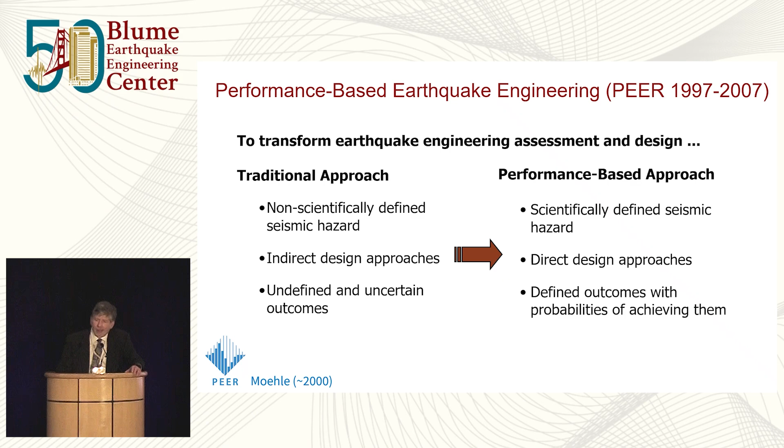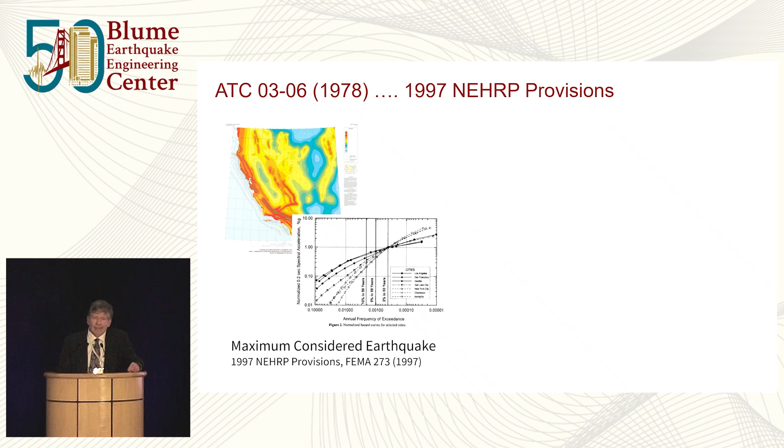Just thinking about things that were setting the stage, PEER started in 1997 with this mission, and it just so happened that was the year the national hazard and building code went from the old zone maps to what we now know based on a probabilistic seismic hazard basis. The maximum considered earthquake appeared in the NEHRP provisions and then in ASCE 7, the building codes, in 1997. So we're starting to get the hazard piece into that.

In terms of the vision of performance, I really credit a lot of the practitioners who worked on these things. This diagram associates different levels of performance with different return periods of earthquakes and with different types of structures, whether it's a safety-critical hospital or other. This was really laid out in SEAOC Vision 2000, which was published in 1995. So these were the things that were kind of in place at the beginning of that process.

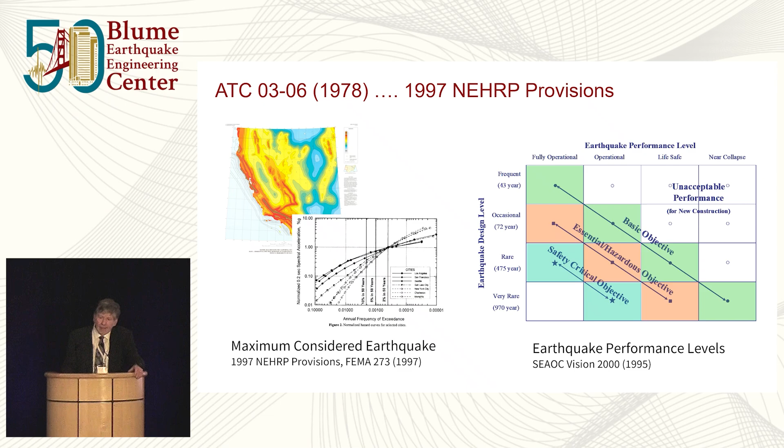Also, some projects going on at the time - Helmut Krawinkler, there was a SAC Steel project looking at the damage to steel moment frames after the Northridge earthquake. Helmut was in charge of a team there looking at overall building performance, doing a lot of Drain-2D analyses of these case study buildings that were put together with SAC.

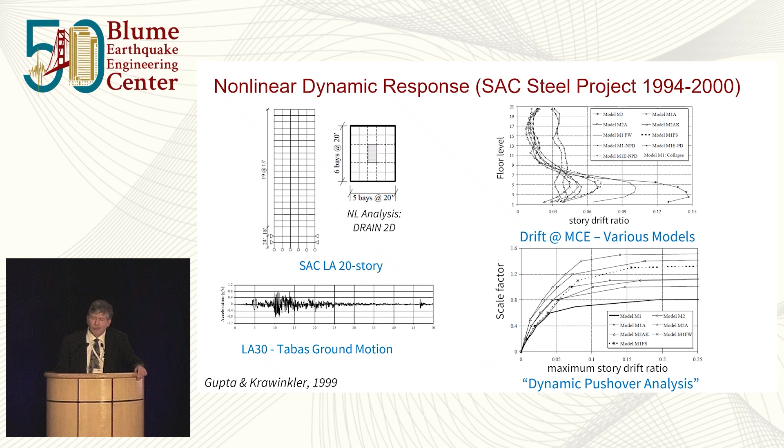And at the time, we were really going from a static pushover analysis to nonlinear dynamic analysis. In fact, the first name these kind of IDA, incremental dynamic analyses, had were dynamic pushover analyses, which is really just taking a ground motion and incrementing it out - but it's not a static analysis, it's a dynamic one with increasing drift.

As Bill and Ann mentioned, Alan Cornell with Dimitrios Vamvatsikos - a lot of people were sort of doing these, but they formalized the method and looked carefully at it. This is a fascinating paper, it has about 6,000 citations, so it's worth taking a look at. They looked at what happens as you increment it and how the behavior changes, and came up with resurrecting cases, as they called them.

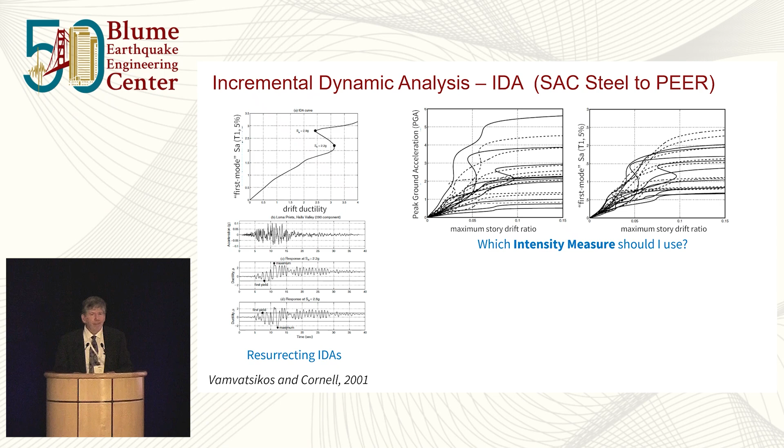Also, an important question was: what do you put on the vertical axis as you increment the ground motion? How do you keep track - is it the scale factor, peak ground acceleration, first mode spectral acceleration? These were all questions at the time that Alan brought to the table. And then there were a whole host of questions on the legitimacy of record scaling, statistics on response parameters, and so forth that are laid out in this paper, and people are still grappling with going forward.

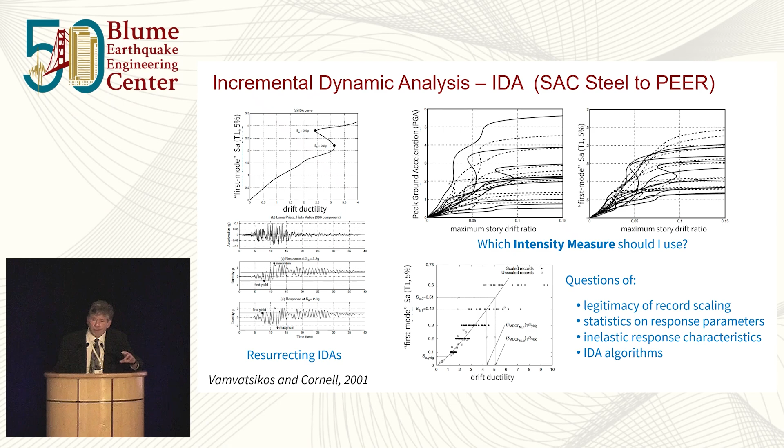But this was like early 2000. Ann mentioned the work of Keith Porter, that PhD thesis on assembly-based vulnerability of buildings, which is what Peer was subsequently going to do in the FEMA P58, this very detailed set of analyses. Keith had actually outlined that in his thesis at the outset. Keith Porter, in the PEER Center, we later enlisted to actually manage some of the testbed case studies that were done in the center, so Keith continued to stay involved in that.

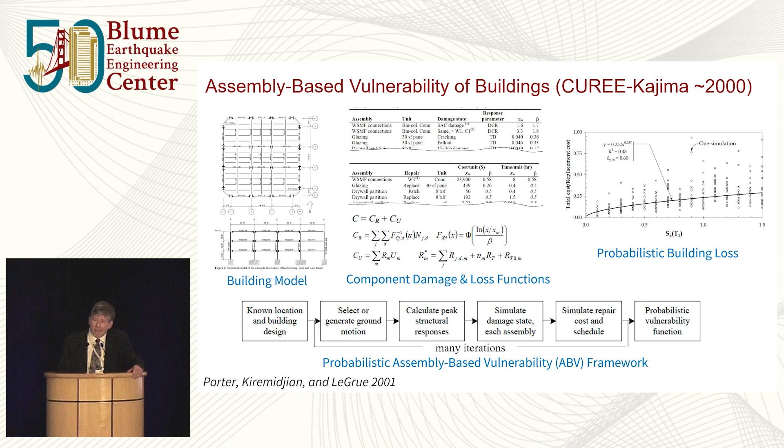Helmut Krawinkler, with a good friend of his, Peter Fajfar, from Slovenia, organized a series of workshops. They became known as the Bled workshops because they were held at this lovely Lake Bled in Slovenia. They started out looking at nonlinear dynamic analyses and next-generation, performance-based building codes. This was big around 2004. By the time Peer came along, a lot of the framework had come together, so there was a lot of discussion there. Then the last workshop in 2011 looked at moving from performance-based to resilience.

In terms of performance-based concepts, Bill Holmes comes up with very clever ideas and ways to articulate those, and this was a slide he brought to the PEER Center. Thinking about first-generation performance-based design, he mentioned ASCE 41 going back to FEMA 273, and where we were trying to go was bringing in dynamic analyses and more explicit measures of response. So that's essentially the framework that was being developed through the PEER Center.

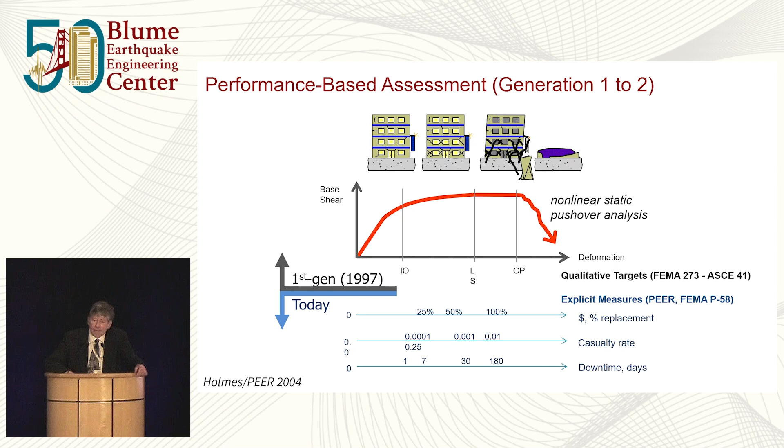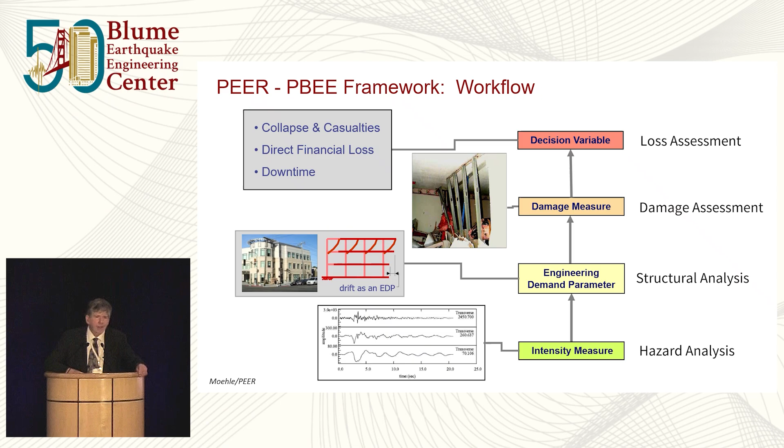In the process, breaking it down, going from the hazard into the structural analysis, into the damage assessment, and then into the loss assessment, clearly articulating each part of the process. When you're working with a large collaborative group, as we were in the PEER Center, you're doling out different projects to different people and groups who work on different parts of that process. So having this kind of modular framework was very helpful that way.

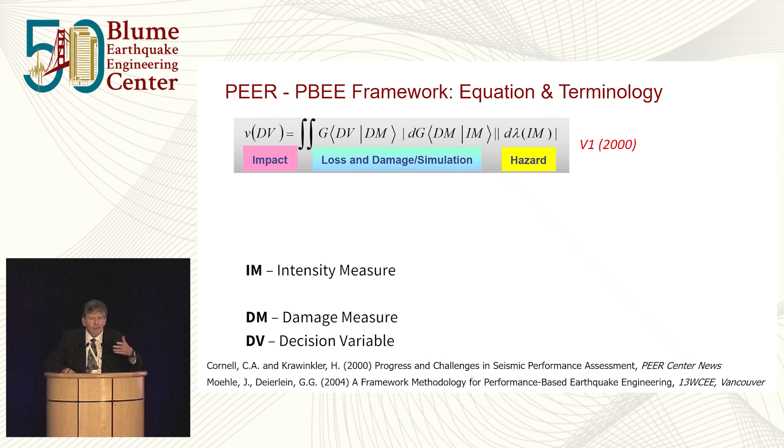The first version of our integral equation was something that Alan Cornell and Helmut wrote in a PEER Center newsletter, a double integral equation going from intensity measure to damage measure to decision variable. The damage measure was actually characterized, if you look at the paper, in terms of drift. Quickly, some discussion arose, though, where we said, well, drift is not damage. Drift causes damage. So we disaggregated it a little bit further.

We got to our triple integral equation, which added in this engineering demand parameter, a phrase Helmut came up with. Going from the intensity to drift and deformation demands, and then to damage, given the drift, what's the damage, and then to the decision variable.

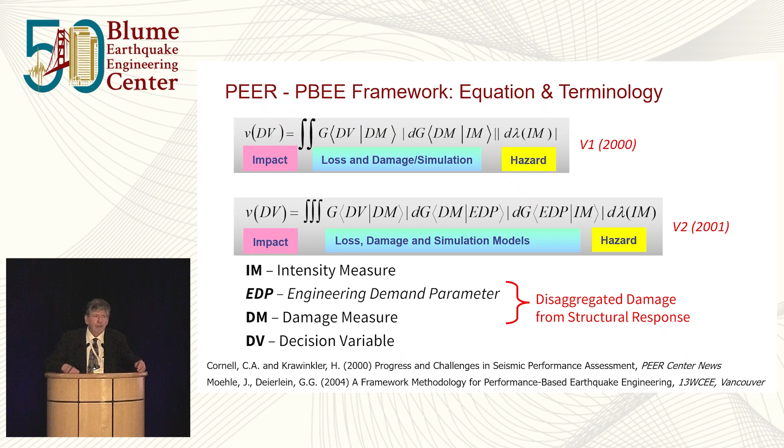I wanted to pause here to say these terms, IM, EDP, DM, DV, if you look around the world now, papers everywhere use this language. It started really with their paper and propagated through the Peer researchers, and then people read that and it continues to be used. It's really a great organizing construct. In fact, in the PEER Center, we used it effectively to explain what we were doing to the various site review teams that came. Now I'd like to touch on a few components of that, the IM, EDP, and so forth.

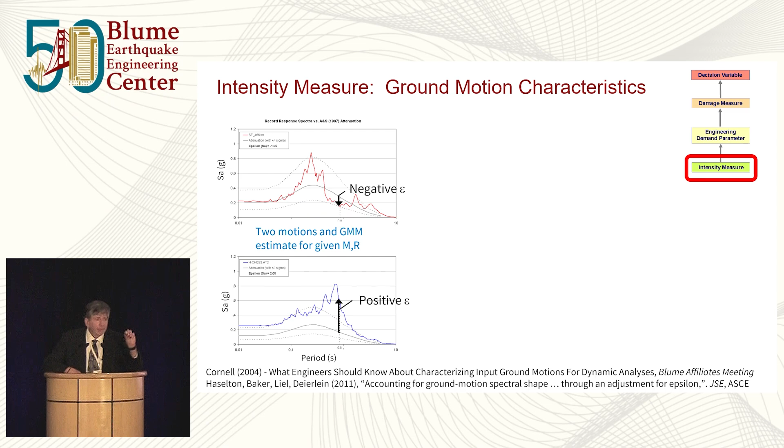The intensity measure of ground motions was an area that Alan Cornell really worked on quite a bit, along with Jack Baker. Looking at it, if you take ground motions with a ground motion model for a given earthquake magnitude and distance, and do a ground motion model, some are above it and some are below, you could have a statistic of epsilon, which is how much the variance is at any given period. When we're doing these incremental dynamic analyses and scaling up something in terms of SA at T1 at a certain period, if you take two ground motions that nominally have the same magnitude and distance, you could scale into the same SA, but the spectral shape would be totally different.

Alan coined this phrase, playing on KISS, keep it simple stupid. At one of our affiliates meetings with the Blume Center, he said it's ISSS, it's spectral shape, stupid. Stupid being stupid is a good thing.

Okay, but this really got into the whole question of record scaling, because at that point we were scaling up records. We weren't using PGA, we were using SAT1, but there was a lot of record-to-record uncertainty. But this began to dissect that there's physics underneath these records. They come out randomly from the earthquake, but there's physics driving the structure.

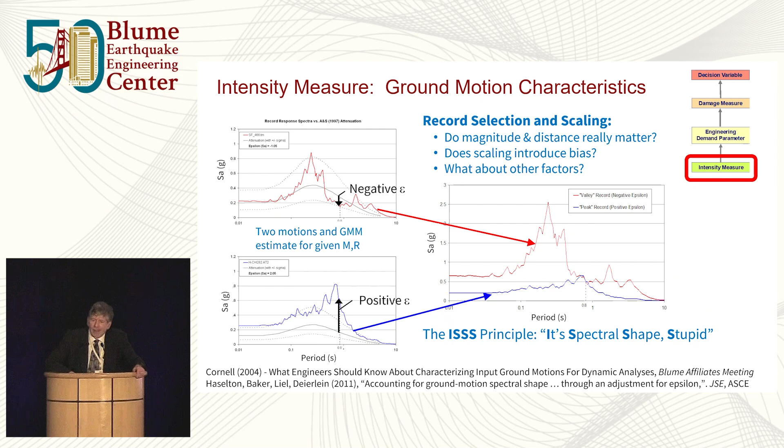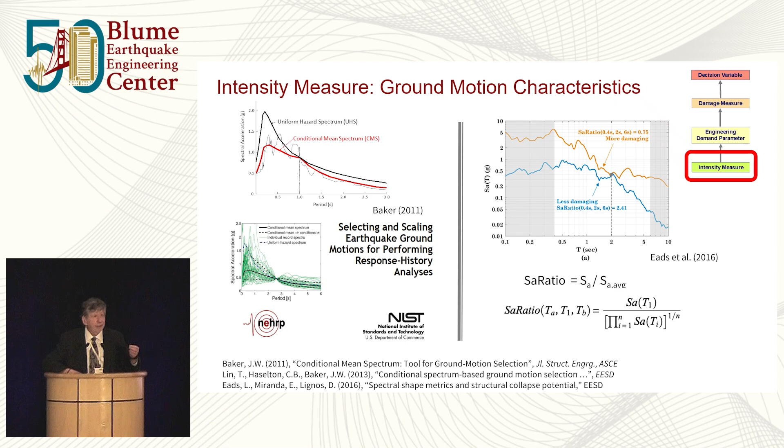So subsequently, Ann mentioned Jack went on to take that concept and develop it further in the conditional spectra that's out there now. Eduardo Miranda has also worked on a different idea, thinking of an SA average, averaging the SA value over a certain period range. You could then normalize that by the spectral value and get an SA ratio as a conditioning factor to characterize the spectral shape.

You could also think of earthquake duration. We've done some work - Abbie Liel and some of her students at Colorado have done this. The duration of the earthquake record heavily depends on the magnitude of the rupture. The rupture is continuing, especially when you get to these large subduction type earthquakes. And if you look at the available recorded ground motions and look at what their significant durations are, and then if you look at a place like the Pacific Northwest under Cascadia, we have no recorded ground motion.

So the thing is, everything we do with recorded ground motions, developing testing protocols in the laboratory and so forth, is kind of predicated on the kind of earthquakes we've recorded, but we need to think of the larger events. So the idea is you could think of duration as yet another adjustment we make to this, quote, intensity measure that could be considered.

But in order to pick up that duration, if you're doing it analytically, you need models that capture the cyclic degradation. Some have done this before - some as recent as the 2000s - without degrading models and see no duration effect. But when you put that duration in, you start to see that effect.

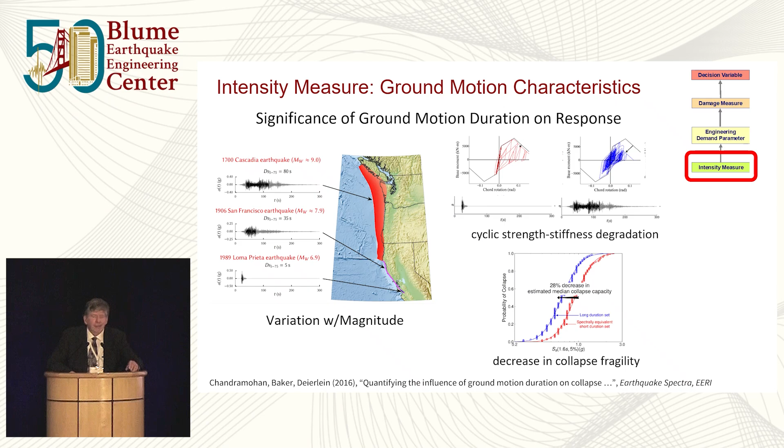And associated with this, getting this engineering demand parameter, doing the nonlinear analyses is looking carefully - and this is where Helmut's brilliance came in - looking at these different hysteretic models. The two hysteresis models shown here nominally don't look that different, but you could see the response of the structure is totally different. Helmut called these happy springs and sad springs.

The happy springs are the ones that even though they cyclically degrade, they keep a positive slope, and when you want to solve simultaneous equations, that's a helpful thing. But if you look at real structural components, they get that negative slope, and that's what causes the really damaging effects. And of course, this has been built into hysteretic models, this IMK model. It's in OpenSees, and quite a few people use it. The IMK is Ibarra, Medina, and Krawinkler, who developed that model that we continue to use for a lot of these analyses.

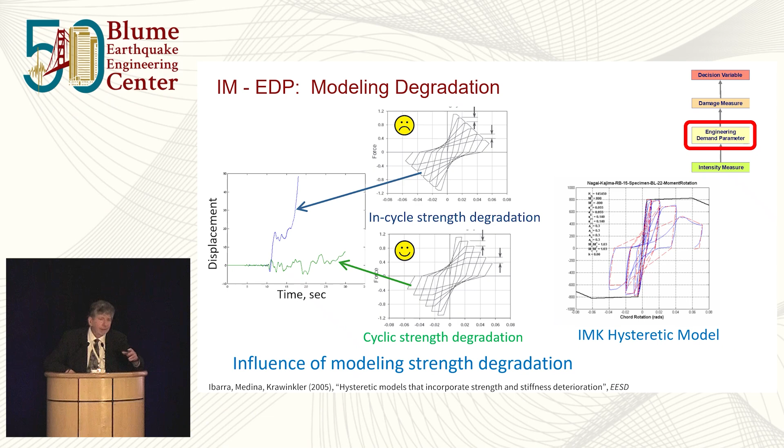Also associated with this is trying to characterize the modeling uncertainties. There are ways you could statistically vary different parameters, but then getting correlations between those parameters - some of it we could infer from laboratory tests, some of it we have to make a combination of that and judgment. This goes back to Rosenbluth's thought: where you don't have data for something, just don't ignore it.

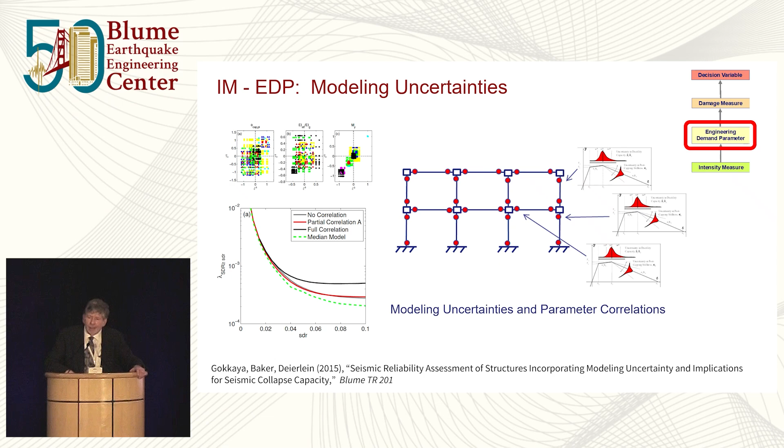We'll apply some judgment. And mentioning going to damage, it was mentioned by both Dan and Bill, and Keith Porter, and then the important work that Eduardo's done with his students. To me, I always like this as a great example: looking at damage to gypsum wall partitions, drift, the different damage states. When you look at a gypsum wall getting damaged, you see a crack, you see a nail pop, you see another nail pop, you see a bigger crack in the wall, and what do you declare to be the damage states?

It's really working back from the repair states - at what point you have to replace the whole wall, at what point you could just patch and tape it. That's associated with the outcome of it, and that really kind of differentiates these damage measures that we use, because we're looking at the next step: given the damage measure, how do you repair it?

How much does it cost? How much time does it take? I think folks in the business were already doing this, but clearly articulating that was important, that we were doing it.

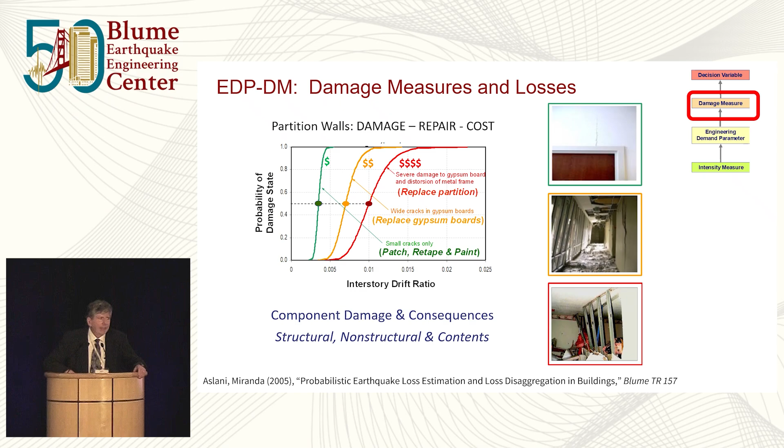And of course, we then take these things up to life safety risk, direct losses, downtime. These are actually terms that I think came out of the HAZUS world, looking at regional modeling. We're carrying it to specific structures.

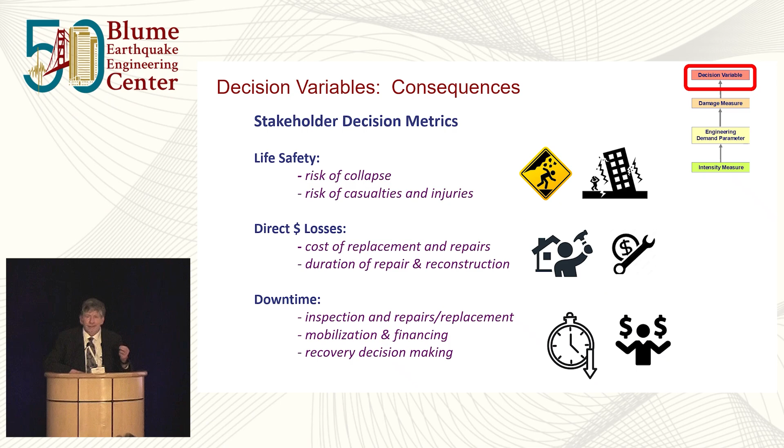Admittedly, when we look at these here, we calculate these. What we do with those, Haresh mentioned this morning, Haresh Shah, how people perceive risk and how they react to it. Are they going to make safer buildings with higher performance? It depends on how you convey that risk to them, and I think that remains a challenging area.

So Helmut and Allin were really masterful at bringing together the community, bringing their corresponding expertise in risk and reliability, the mathematics that Allin brought, and Helmut's understanding of structural behavior. But they point out that assessing risk is not the end game, it's really changing the future. How do we change our building codes, come up with innovative systems, and so forth.

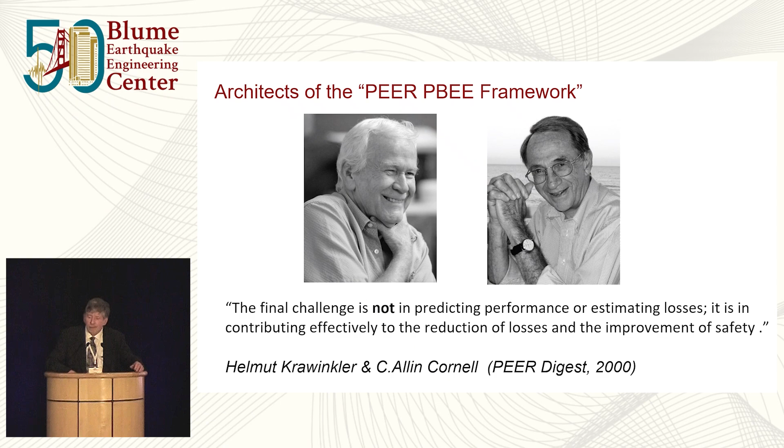So I'd like to show a few examples that we did in the PEER Center at the time. Mary Comerio, who many of you know, is on our research committee, and when we were going through these things, she says, well, you guys could do these analyses. Why don't you figure out what's the safety we have in our current buildings? And it was like, oh, the light went off.

And so we had a benchmarking project, developed at the time a code-conforming reinforced concrete building, and brought it through this fancy new methodology that we had come up with.

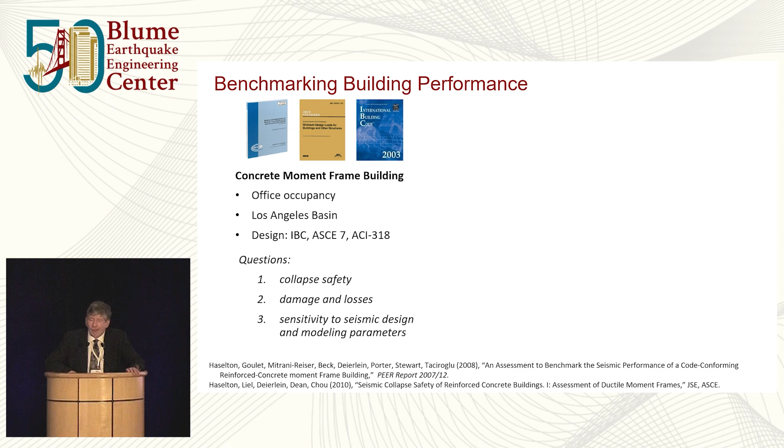Coming up with an archetype structure, making these detailed computer models, looking at all the experimental data from laboratories coming out, making the model as realistic as possible, doing one of these IDA analyses that we've been talking about through a couple of lectures, taking those intensities at which the collapse occurs, flipping it around and creating a, quote, collapse fragility function, the SA value associated with the probability of collapse, building in some modeling uncertainties into that, which adds the dispersion into those fragility models.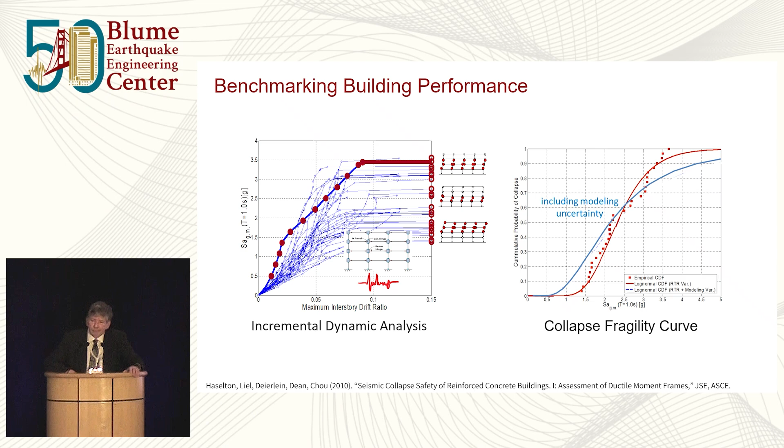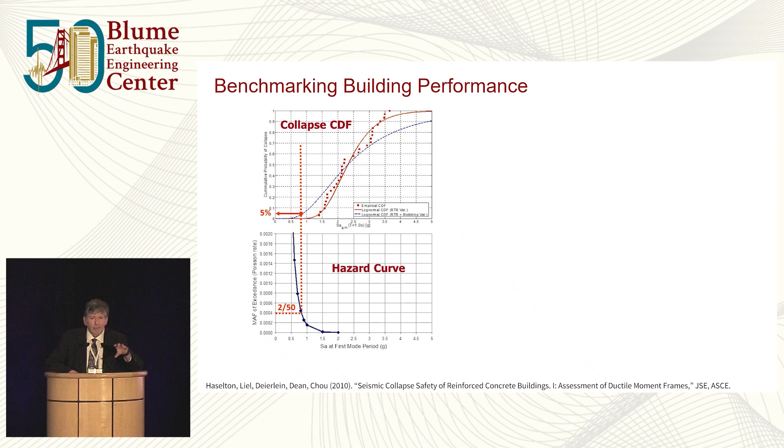And then, of course, you could take that collapse fragility function, probability of collapse versus ground motion intensity, and associate it with a seismic hazard curve, which is the likelihood, the mean annual frequency of exceeding that intensity ground motion at a certain site, to get an absolute risk. At the time, this was one of the first serious efforts to look at a code-conforming building and ask, what performance do we get?

And then you could start to look at this and say, well, when you say a building's safe, what do you mean? You could go to the maximum considered earthquake level and ask, what's the probability of collapse there? Well, it's 5% under the maximum considered earthquake. You could integrate it with the hazard curve and get a mean annual frequency, or if you average that out over 50 years, a 0.5% probability of collapse. And then the big question is: is this acceptable?

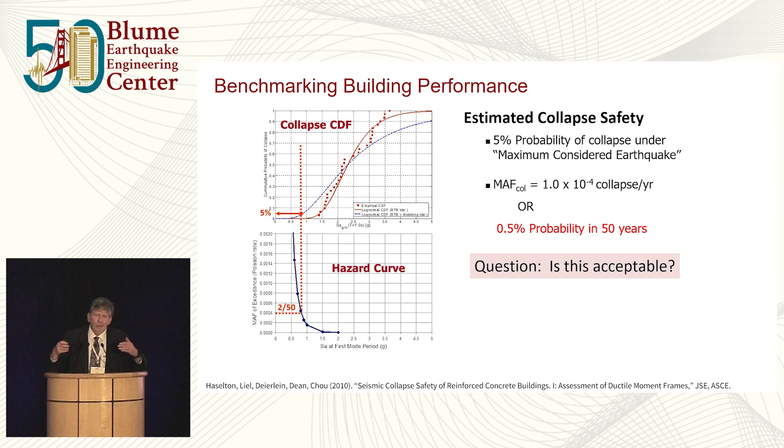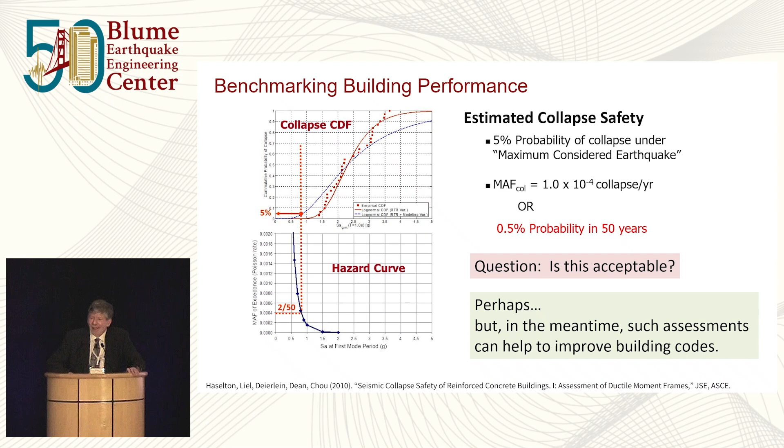Actually, someone who worked at the PEER Center, Peter May, a political scientist, said that's the wrong question, is it acceptable? Because no one can really answer that. It's like, well, how much would it cost to be a little bit more safe or a little bit less safe? That's maybe the best way to address those sort of questions. But we can't really answer that, or at least as engineers we can't. In the meantime, we could use this to improve building code provisions.

And coincidentally, this work was going on with PEER at the same time as the ATC 63 project on collapse prevention, which Charlie Kircher headed up, and we had the opportunity to work with Charlie on that. We had built a bunch of different archetypes according to the ASCE 2005 standard.

And we noticed a troubling trend that with taller buildings, the risk of collapse would increase. And someone on the team said, well, didn't you, Curt, when you designed these buildings, did you use the minimum base shear?

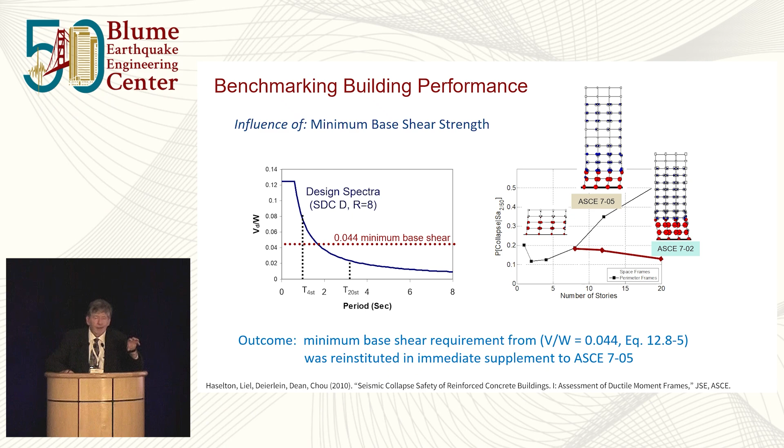And Curt said, what minimum base shear? It turns out the minimum base shear had been taken out in 2005. It had previously been there in the 2002 ASCE 7. So we redesigned some buildings with that minimum base shear, and as a result, that minimum base shear came back into the standard and stays there today. So this is just one example of how you could use these sorts of tools to tweak the building code provisions to get more consistency.

Related projects, Eduardo and the team worked on this, looking at the losses for these buildings, calculating the losses. Some things that came out in studies Eduardo did with students: there's the risk of collapse, then there's the risk of damage, non-collapse, where you're going to repair it, but there's also this other risk that you might get so much damage and distortion to a building that it's still standing, but essentially you need to demolish it. That's a level of loss that trumps whatever the repair cost would be, so they could start to differentiate those sorts of things.

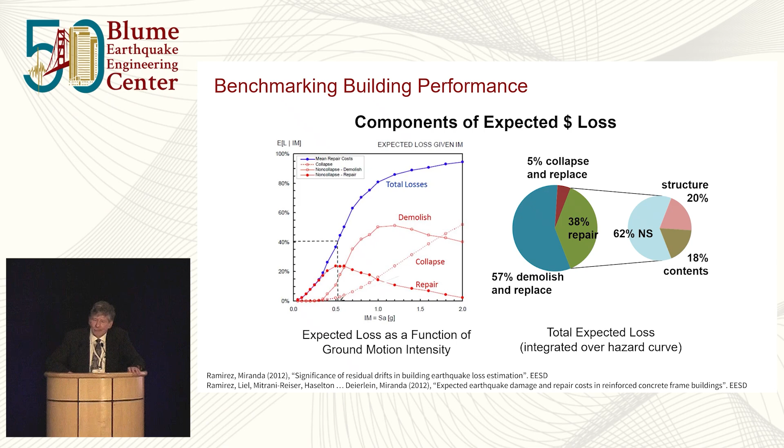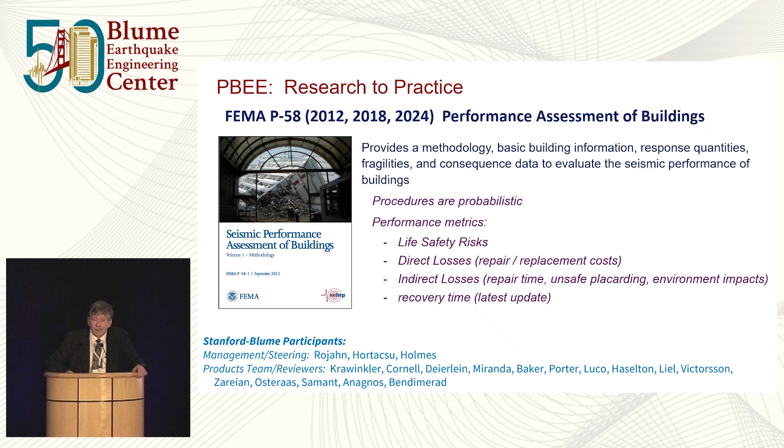I'd like to mention one last study before we wrap up, a little more recent one, where we were enlisted on another PEER project. We got pulled in and funded by the CEA, who was interested in incentivizing homeowners to retrofit the kind of foundation wall, cripple wall part of their house. Janiele Maffei leads this tremendous program at the CEA to incentivize that, and possibly to alter insurance rates for people if they do that.

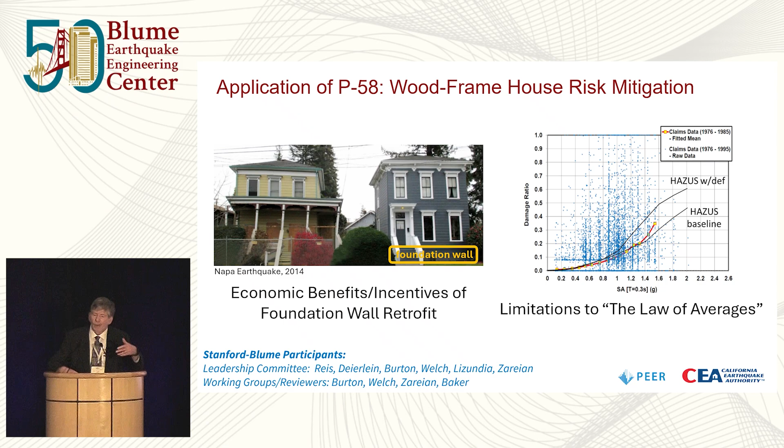Now, the plot on the right shows a lot of the loss data from houses collected over the years. Under certain ground motions, a house is undamaged, under others, it's 100% loss. If you draw a curve through it, lo and behold, you get an average that looks like the HAZUS loss function. That's good for getting an average loss over an area, but if you're trying to incentivize homeowners to do something with their house, maybe they need to know more details about their house—is it 1 story, 2 story, stucco, wood siding?

Dave Welch, who's here, ran a zillion analyses for this, but we took FEMA P58 detailed OpenSees computer models—I think we had 115 different archetypes, configurations—and you couldn't do this without developing a computational workflow to automate the process and come up with damage functions.

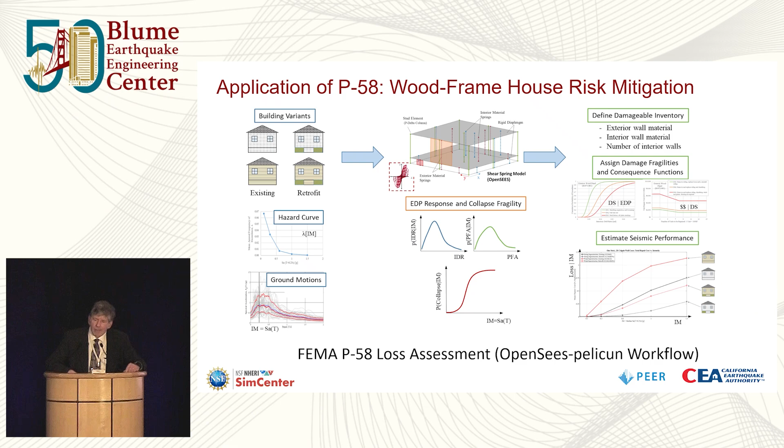And just to demonstrate, depending on whether, for example, you have a house with wood siding versus one with stucco, which is typically a more robust enclosure, what's their collapse risk, and how much you could avoid that by retrofitting this small foundation element.

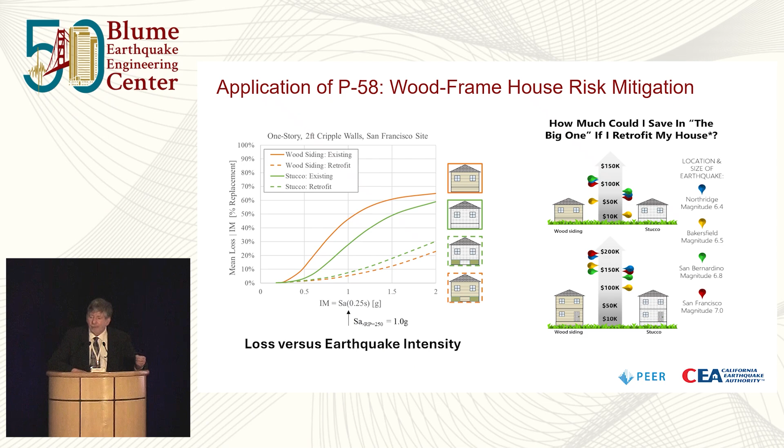And I think, going forward, taking this idea of what we're doing building by building to the regional scale—this is something we'll cover after lunch today—we'll start to go from performance-based assessment of buildings into regional risk and resilience, but that's kind of the future, if you will.

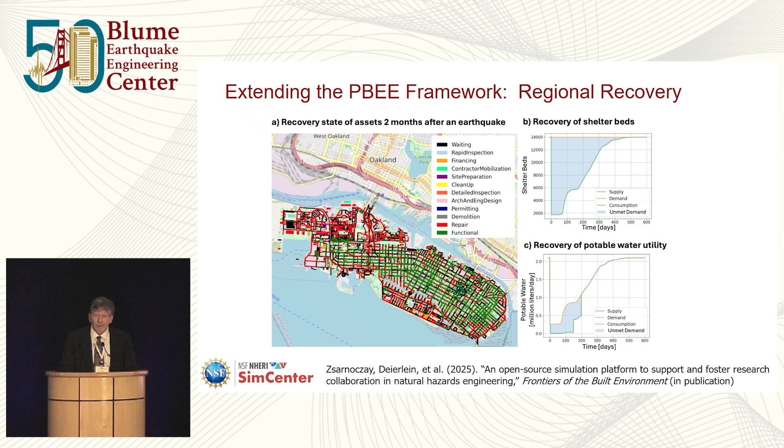So I'd just like to end by, again, acknowledging the important role that PEER and ATC in particular, the SimCenter, and these federal agencies have played—we're hoping they're still going to be there supporting this work going into the future. So thanks for your attention.